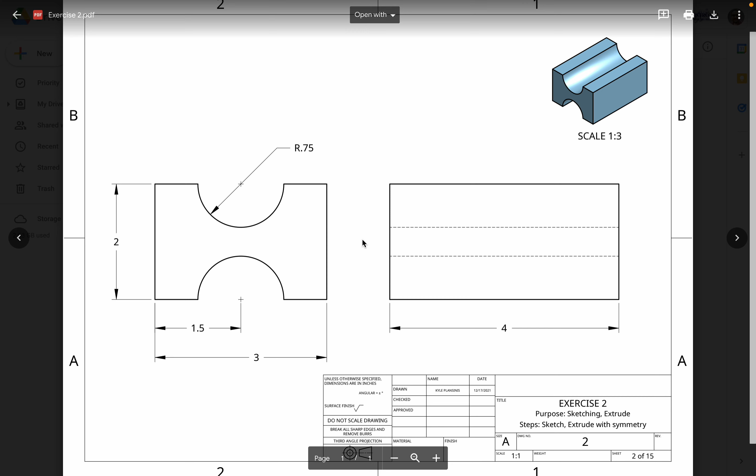With Exercise 2, it's a relatively simple sketch, and I wanted to keep it nice and quick. The first one was a little longer than I wanted it to be. So with this one, I'm just going to show you a couple of features in sketching that will make it either easier or just give you a few more tools. And then I also want to show you extruding with symmetry, just another tool for you to use.

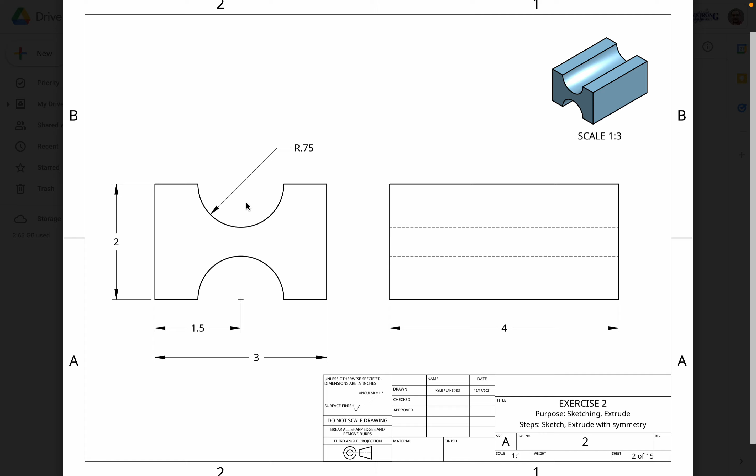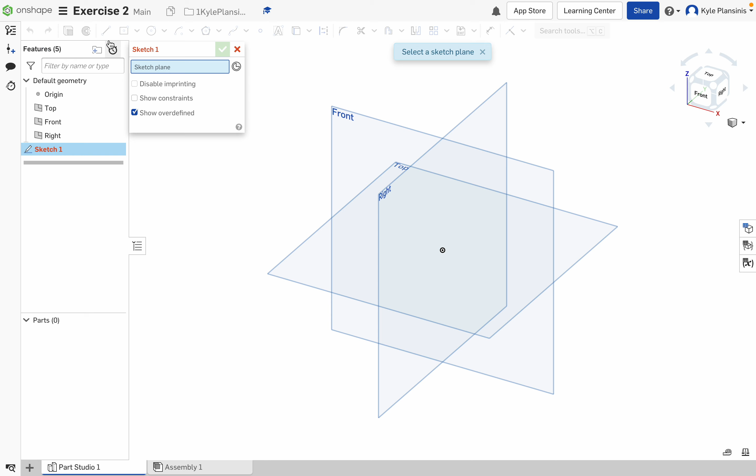Once the workspace has loaded in, we're going to use the Sketch tool again. We're going to select the front plane, and use the shortcut on our keyboard, the letter N, to normalize that sketch. Again, I like to turn off all of the extra planes and only use them when I need them. This just helps clean things up and makes it a little easier to work with a less crowded workspace.

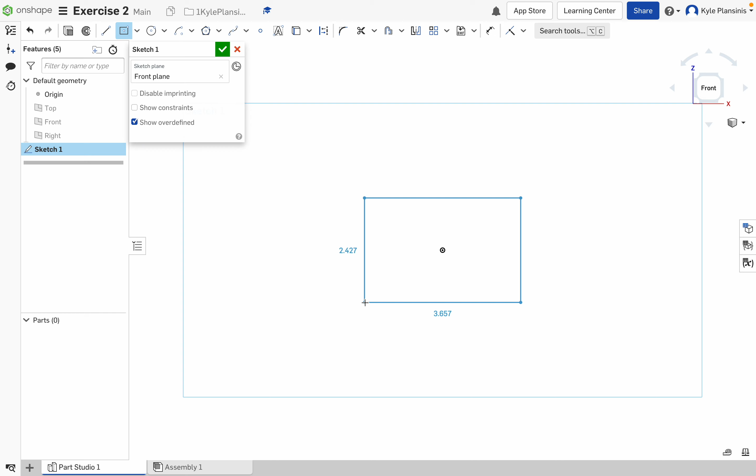We've used the rectangle tool in the past, but we're going to use a different type: the center point rectangle tool. This allows us, instead of selecting a corner, to select the center point location. We're going to select the origin because that helps us lock down our dimensions. Then we're going to move outward until we get roughly the size we want—it doesn't matter exactly because we're going to enter the measurements we want.

Our width for this part is 3 inches, so we'll type in 3, enter, and our height is 2 inches, enter. If it gives you the box to the left first, just make sure you put 2 in that one and 3 in this one. That's pretty much the overall basic shape of our part, but we have to add in a couple of arcs.

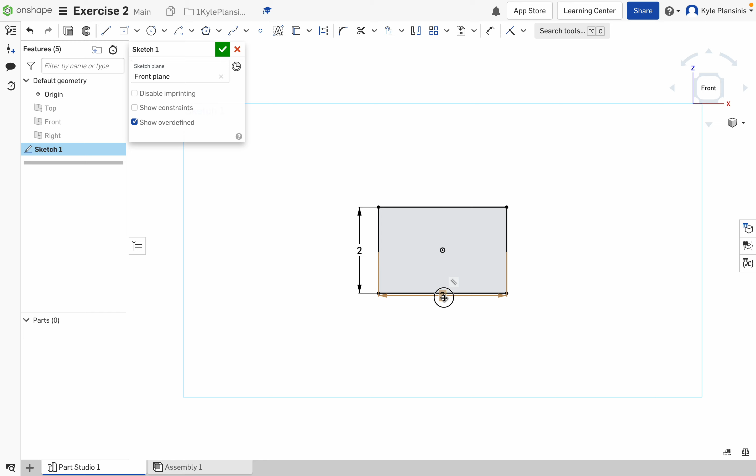There are two ways you could do this. One is drawing a circle first. If I wanted to draw a circle first, I would use my center point circle like we did before, and hover over this line until I get a node. When it appears to be in the center—this symbol tells you it's coincident, this one tells you it's a node, shown as a dot on a line—that lets you know it's in the center of that line.

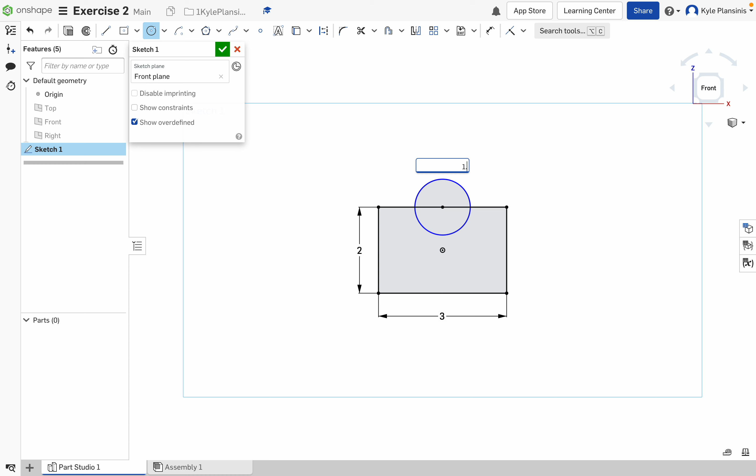I'll hover over that until I find that little box appear, click, and draw out a circle. This is how we would have done it before. Our radius is 0.75, but the symbol there, that 0 with a line through it, is asking for a diameter. The diameter is just double the radius, so it's going to be 1.5 inches. Type 1.5, enter, and that locks in my diameter.

I could leave it at this, but typically you want to clean up your sketches. So I'm going to trim out these lines here, and then I'm finally left with the shape I want.

I want to show you another tool that makes this a little easier. Instead of drawing a full circle, we can just draw part of a circle using the arc tool set. We have all these different types here, and we're going to use center point arc. When you're trying to align to center, that's definitely what you want to use. Depending on your use case, you would select one of these.

I'm going to select center point arc and do the same thing: mouse over this bottom line until I get that box indicating center, then click—that establishes my center. Now I need to establish a radius.

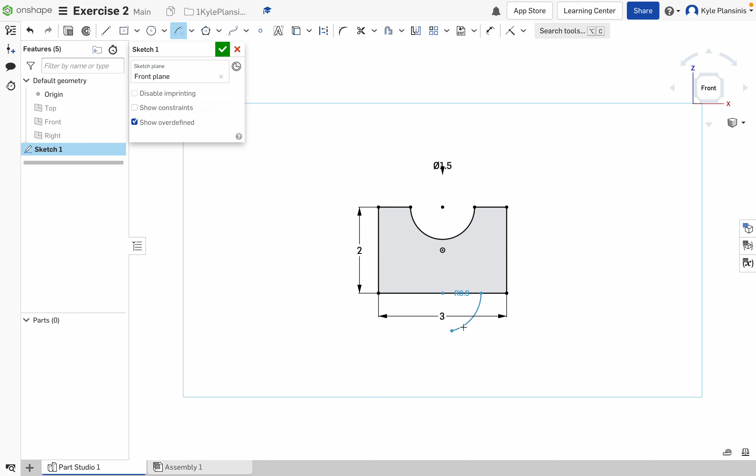It's best practice to follow along the line, and you can get it closer, though it really doesn't matter what you decide for your arc to be. Once you click again, it's going to follow your mouse in an arc whichever direction you go. We want this to sweep to the inside, so I'll mouse that direction until I get back to the other line and it's coincident with it. Click again—now it's asking for a radius this time, so I'll put in 0.75.

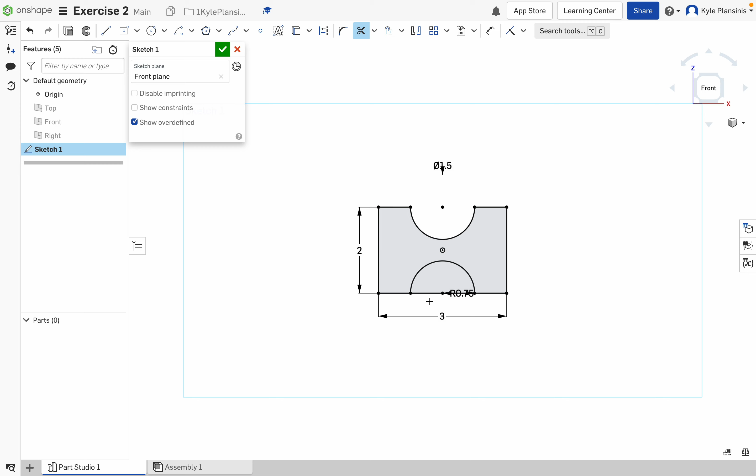My shape is pretty much complete. I should just clean up my sketch by trimming out those lines. Now my sketch looks almost exactly like our drawing.

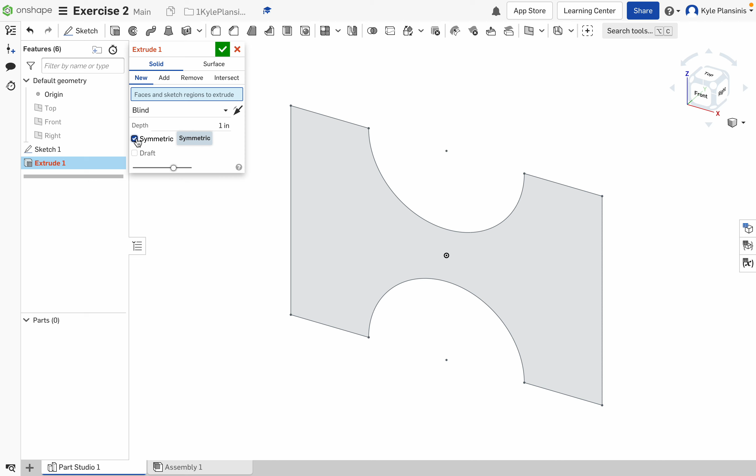From here, I just need to extrude. Hit the green check mark on our sketch. I like to extrude in a 3-dimensional view, so you can choose one of these three. We're going to choose our extrude function again, but this time select symmetric. If I click on this, you can see it goes one direction, but if I click on symmetric, anything I do to one side happens to the other.

This is web-based, so it takes a little bit to render, but whatever I do to one side happens to the other. Our depth is still our total distance, so our distance is 4 inches. I'm going to put in 4.

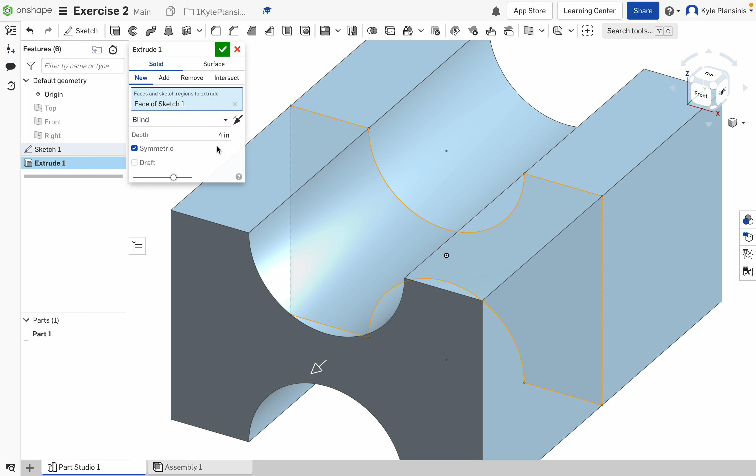To preview this—this is one feature I don't like, it doesn't automatically update here. While that's still selected, you need to click somewhere else inside that window. It's a bit of a nuisance, but that allows you to preview what's going to happen before you approve it. So if you came in here and, say, made it 4.5, you'd have to click somewhere else to see that, but we want it to be 4.

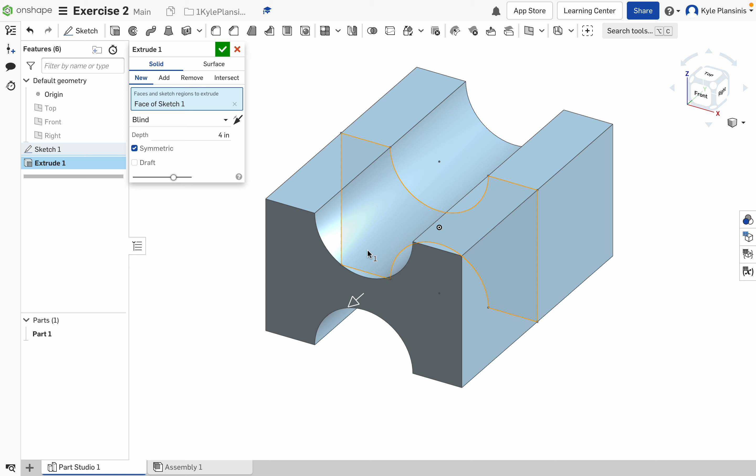Click there—that's the final shape. I click the green check mark, and that is our completed drawing.